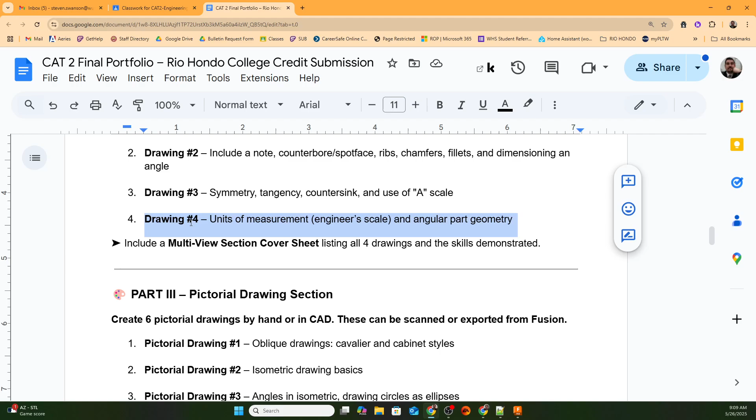Okay, for this number 2, well, part 2, drawing 4, this one here, it just says units of measurement or engineer's scale, so we'll get to that. That just means we're using inches and we're using fractions rather than decimals. And angular part geometry, so we just have to have an angle. I'll probably add a couple other things from up here as well, just to make sure we cover all our bases with this one. So let's get to it. So let's start drawing.

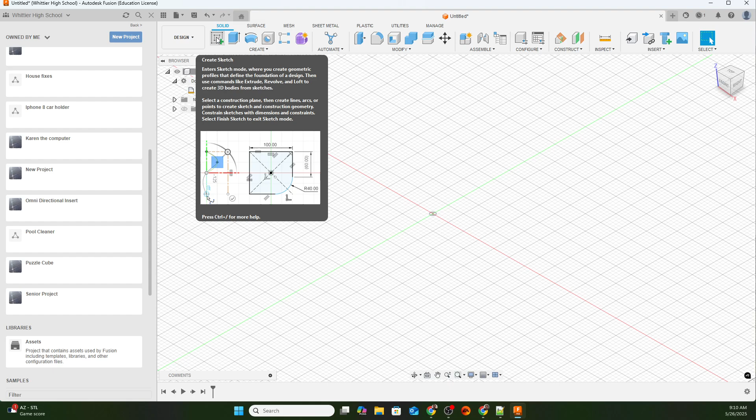First thing you're gonna do is go to document settings and go to here and click this and make sure you're in inches since we're in engineering units here. So make sure you're in inches. Click create sketch and click right here on this back page. That's what I'm gonna do. So this one right here, sort of this back plane. I'm gonna go to lines. If you don't know where that is, click create and go to line here.

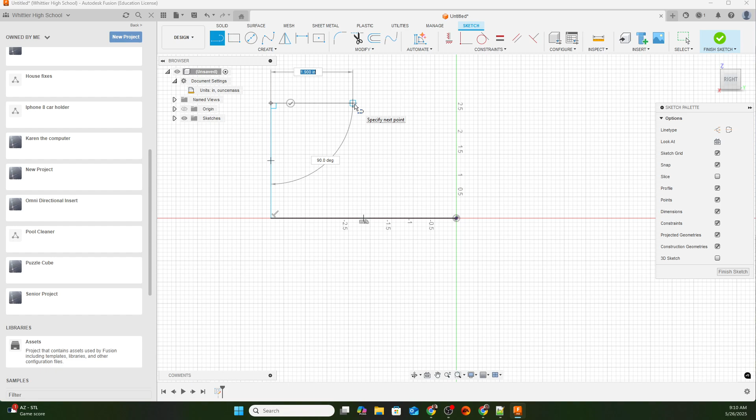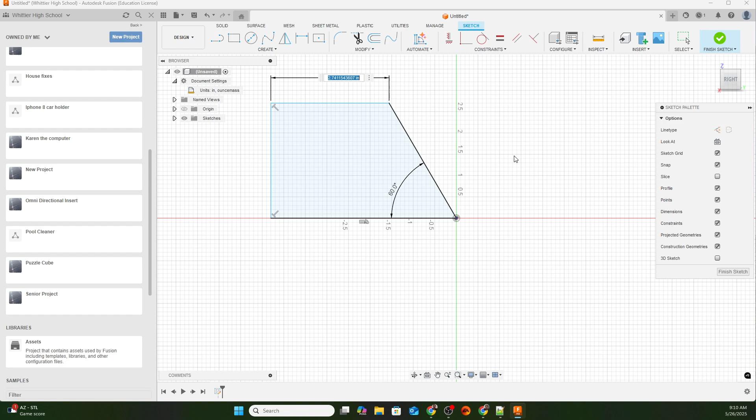And then we're just gonna click here. We're gonna click here, go straight up, go about halfway, it doesn't matter exactly, we're going to dimension it. Click, and then click here to make that angle and click back, and it should be fully shaded. Now it's all blue because we haven't dimensioned anything, so let's do that. First thing I'm going to do is make sure I have a 60-degree angle here, just a nice clean angle. There we go. And this right here, let's make sure that this is, let's say, 2 inches. 2 inches should be enough.

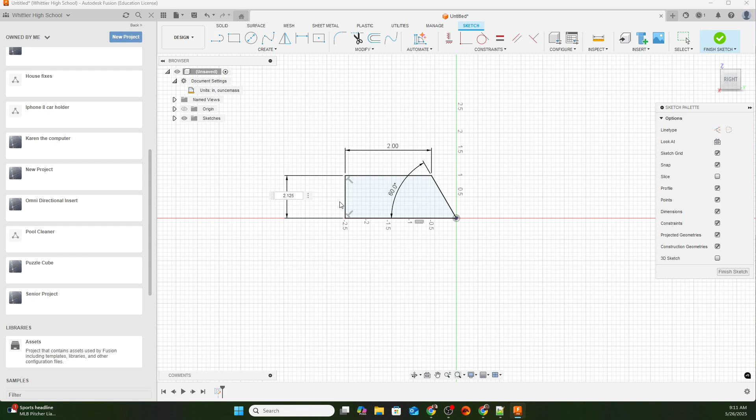And the height here, we can't go too low. If I try to go like 1 inch, it'll probably give me a weird error. No, it didn't actually. I thought it was going to mess up. Just shorten it. Let's make this 3 inches. Now let's go 2.125. The reason I'm doing that is that's a nice fraction. 0.125 is an eighth of an inch. So we want to demonstrate that we're going to have some fractions here, right? So in fact, we should probably do that here as well.

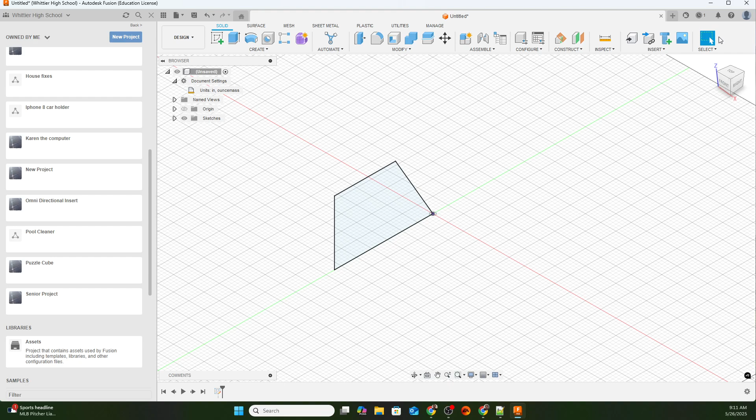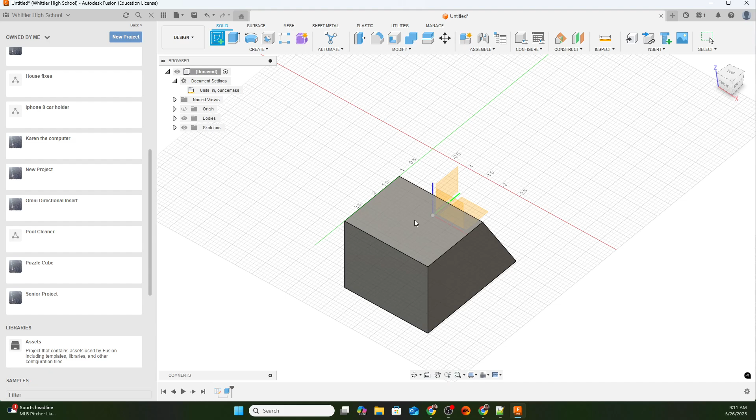Now we can leave that 2 inches. Let's just leave that 2. And we'll do a fraction on the extrusion. So let's go finish. And let's push extrude. And we're going to extrude out. Let's go 2.5 inches. So we have that kind of fractional number. And we got an angle here and everything like that. That's great. Now we're going to go to sketch and click the top of this thing. We're going to add a hole. And we're going to do that counterbore that we were supposed to do before. So this will be review.

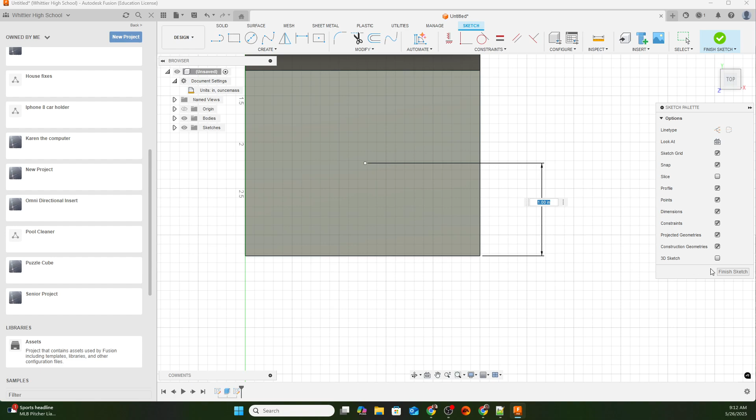Click create. We're just going to click a point and click somewhere in the middle about. We're going to dimension it anyway. And I'm going to click this, and that's 1 inch exactly, which sounds good to me. And from here to here, so we have the other dimension, it says 1.27. That's almost 1 1/4, right? So let's go 1.25, and that's probably the halfway point as it looks like. I think we were 2.5 inches extrusion, so 1.25, which is perfect. We're going to get a nice 1/4 inch. So we're going to get a fraction again.

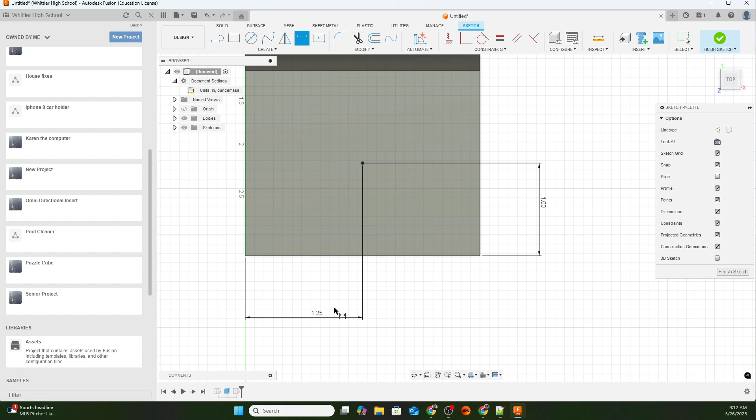Click Finish Sketch, click Home. Let's add that counterbore right there. So let's click Hole right here. If you can't find it, click Create. You'll find Hole here somewhere. There it is, Hole. Same thing as clicking up here. Click here, and make sure you click Counterbore. You're probably on a simple hole. We want to do a counterbore.

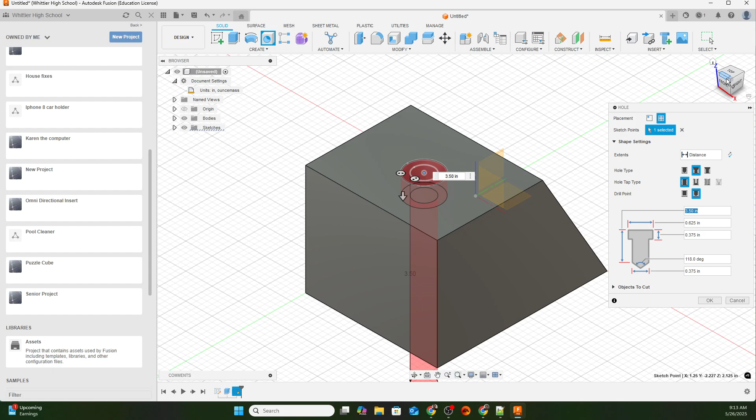And I did some research because I wanted to make sure we're doing an actual counterbore that's common. I mean, you can make a counterbore anything you want technically when you're machining, right? But most of the time we're trying to follow along with certain bolt sizes and stuff. So first off, I want to drill all the way through, and 3 inches is more than enough. So I think actually 2 inches, no, 2 inches doesn't go through. So let's just put 2.5. That's the depth of the hole, so we want to get all the way through.

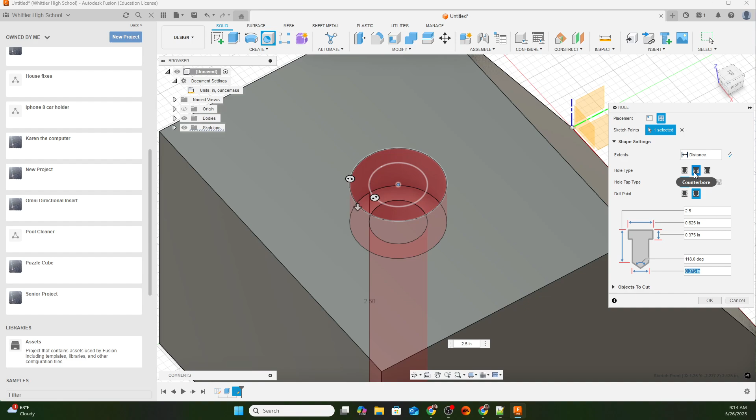The top hole, so this bigger part right here, this larger hole, is 0.625, and the depth of that wide hole is 0.375. And you don't need to worry about this angle cut because we don't see that anyway because we're drilling all the way through. That's only if we weren't going to drill all the way through. And then the width of the hole is 0.375, which is 3/8 of an inch. Got us plenty of fractions right here to talk about later. So put OK when you're all done with those numbers. Make sure you're on that counterbore. And put OK. And there we go. We got a nice counterbore right in the middle, more or less.

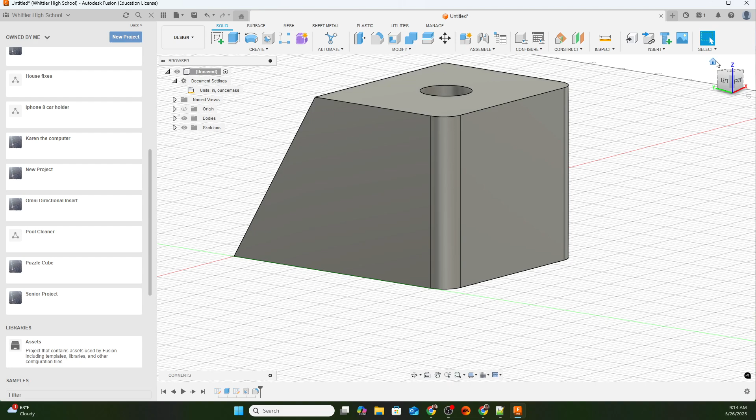The only thing I'd like to do is add a fillet. So let's click fillet and let's fillet these corners, this one and this one. And let's fillet it a nice 1/4 inch, 0.25. Put OK and click home and you'll see that we're done. Now, here's where you need to pay attention. You need to save this and be organized. You should do this with all your projects, Automata Box or anything, or your Fusion assignments during the year.

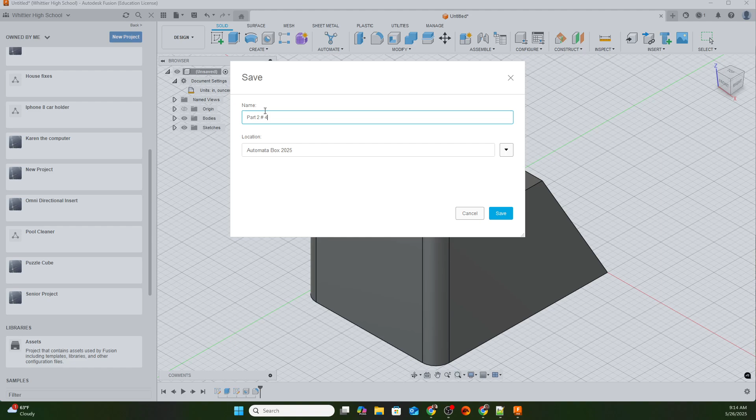Click Save, and then always name it. This is Part 2, Number 4, right, of the portfolio. We're not going to save it in the Automata Box. Okay, so let's find somewhere else to save it. I don't have a spot, so let's click New Project and call it Portfolio. There we go. I couldn't see that there.

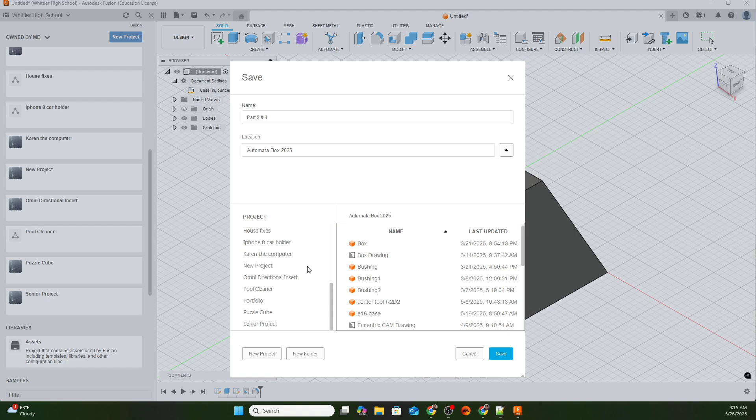Portfolio, and then I guess you click away from it because we haven't changed it yet, so careful, don't click Save yet. And then it creates that folder, so you have to kind of click off of it, and it'll create it. Then select it. Now you'll see that it changed it. And then we got the name correct, click Save. Now it's saved. All right. Now, that's pretty much it, okay? So the next video I have will be about how to do a drawing. So this is our part that we need to do.